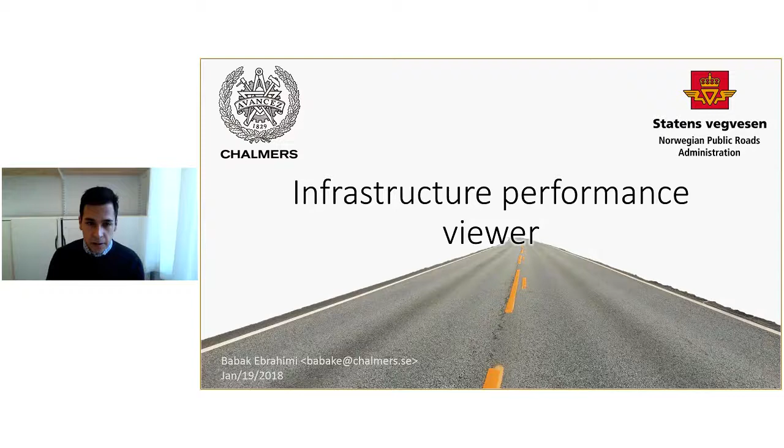The work of our research is related to sustainability of road infrastructure in Norway, and we quantify performance of material, product, services, systems, and this is done due to the fact that there is a strong causality between sustainability and performance of materials. But later on, quite very soon, I will get to the point of what I mean by sustainability and performance of materials.

For today's presentation, we're going to have a straightforward and minimalistic agenda, which means that I will go through the background of the research, talking about some of the research topics that we have done and the summary of the results, and at some point in between these slides I will talk about the outlook and the future of the research that we have, and a brief explanation about this research that we have been doing.

Our research is dedicated to Norway because the Norwegian Public Road Administration is our funder, and this is the nation that we've been dealing with. It's a country with a population of 5.2 million people, which, if we put it into perspective, has the lowest population density in Europe after Iceland. And as you can see, the majority of the population is located around the coastal area in Norway.

And this is a nation where road transport plays a fundamental role in people's life. Around 88% of all motorized travel undertaken in Norway is by road, and about 50% of all goods are transported on roads. And based on the plan that has been explained by the Ministry of Transport and Communication, the idea is to invest more in the Norwegian transport system to increase connectivity and help the nation to get closer together.

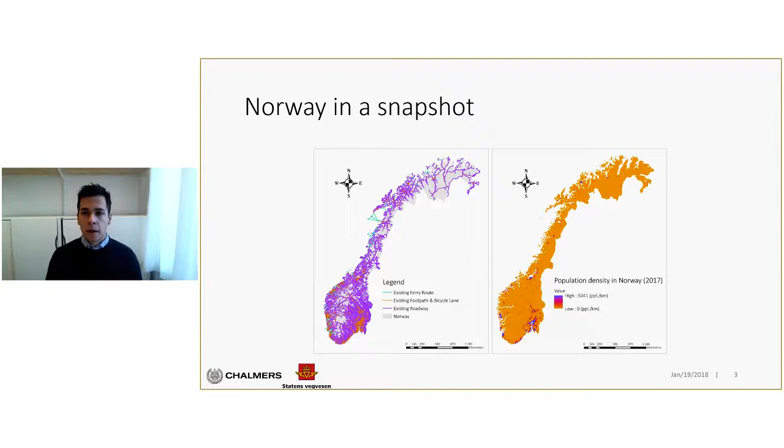And having this trajectory, the idea is to spend more than 1,000 billion Norwegian kroner over the course of 12 years to modernize infrastructure while developing the transport by providing more effective, more efficient, and greener solutions at the end of this time plan.

And to be a bit more specific, based on the mandate that the Norwegian Public Road Administration has received from the government, the NPRA has an idea to enforce various climate mitigation measures. The idea is to decouple negative environmental impacts and resource use from economic prosperity and social welfare of the nation. And in doing so, the NPRA is tackling various aspects of road infrastructure.

Some of these mitigation measures are happening in the in-use phase of road infrastructure, by vehicles. In achieving the goal, the NPRA plans, in a series of time frames, to increase the share of biofuels and reduce the non-renewable or conventional fuel sources, and at the same time change the powertrains of vehicles by using more hybrid or electrification of vehicles.

And at the same time, they have a broader perspective, meaning that they are focusing on the entire life cycle of road infrastructure, aiming to reduce greenhouse gas emissions by 40% from the construction of road infrastructure and by 50% from the maintenance and operation of road infrastructure.

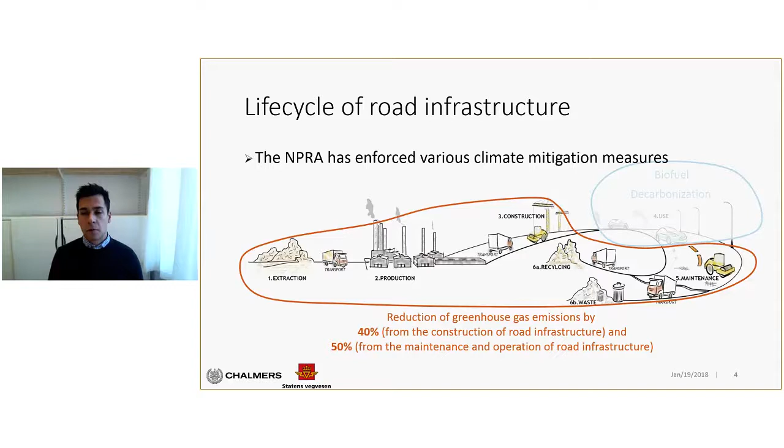However, in this research we only focus on the solid road infrastructure, and we exclude the use phase, the vehicle aspect, from our research topic. To be more specific, the goal of our research is to support the Norwegian Public Road Administration to economically and environmentally plan and maintain their open road network.

And the scope of our research is to use two well-established and widely used methodologies that are known as life cycle assessment, LCA, and life cycle cost analysis, LCCA. And using these two methodologies, we are planning to compile and assess various data and visualize our assessments.

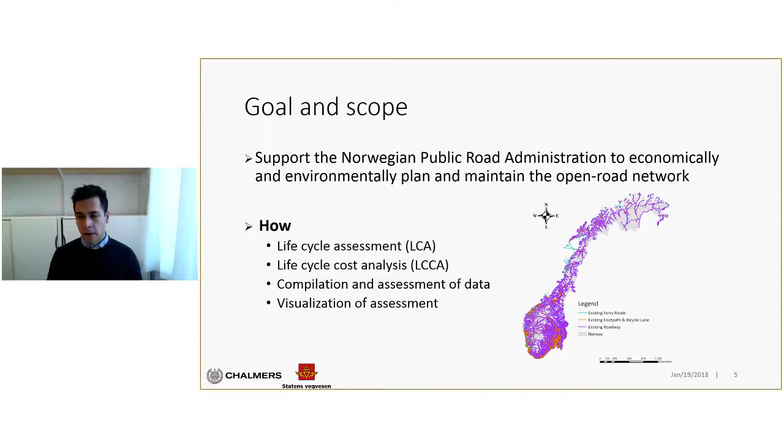And in this journey, I'm not alone. I am working in a team of 6. I get supervision from my supervisors, Holger Wallbaum and Rolf André Bohne, from here at Chalmers and NTNU. And along this journey, I have 3 companions. They are all PhD students, 2 in NTNU and 1 in Agder, and we are all financed by the Norwegian Public Road Administration.

And the idea is to support each other and try not to step on each other's toes, but try to move and help each other out and try to find a solution from different angles and perspectives. And this collaboration wasn't only in words, it was also on papers.

So this resulted in various publications and co-publications. In this presentation, I'm going through 3 of these publications, and if you want, you can also have access to them whenever you would like. So now I'll go through one of these papers, which we carried out at the beginning of

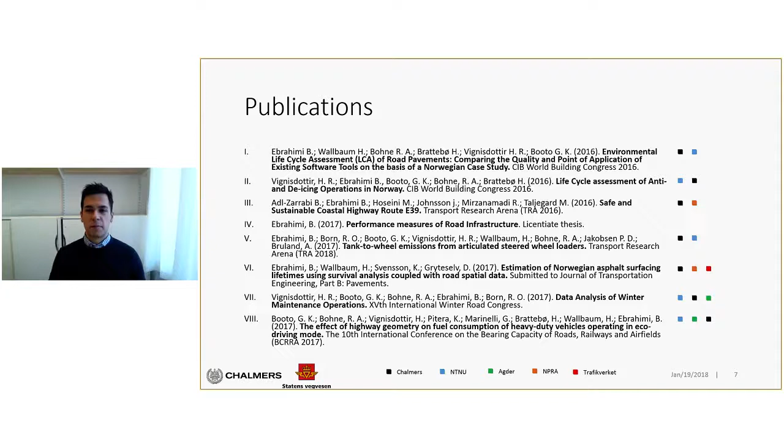my PhD life. At the beginning, we wanted to know what life cycle assessment is from the Norwegian Public Road Administration, and what their perspective is about LCA per se. We also wanted to know what software tools exist, how and to what extent they've been used, what the gaps are, and how we can improve these gaps in the software.

2 of them were more in the early planning phase, and one was more towards the maintenance aspect of road infrastructure. Some were pure LCA-based software, and one, EFFEKT, was more of an economic, social or cost benefit analysis software that eventually got an update to also do life cycle assessment. Instead of only a qualitative assessment, we also wanted to do a quantitative evaluation of the softwares.

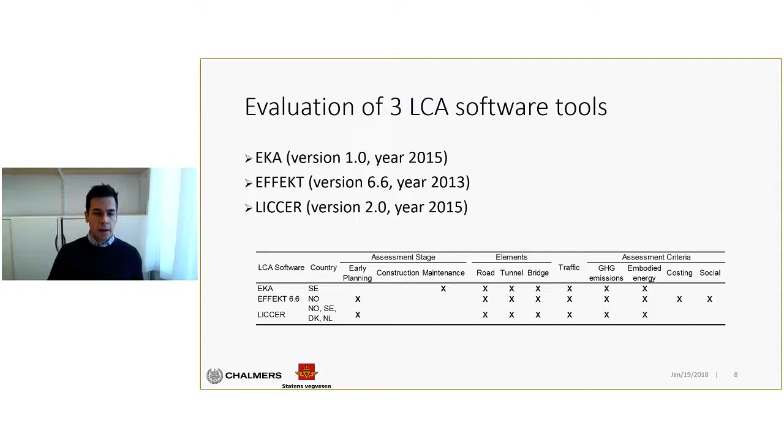So we designed a hypothetical case. We used one of the geometric road designs in a manual in Norway, road class H9, which is a 4-lane road, 2 in each direction, with a travel width of 3.5 meters and a hard shoulder of 3 meters, and in total the road width is about 23 meters.

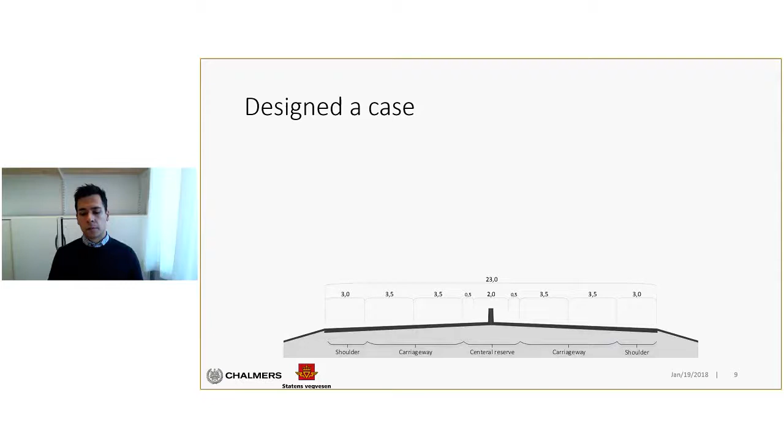We used manual N200 to design a pavement. With the assumptions we made, a certain ADT class with a certain traffic growth and so forth, we designed a particular pavement based on the manual. However, the software tools were not the same, so to do the assessment properly we needed a really clear system boundary.

So we used the European standard 15978, about sustainability of construction works, to define what stages we need to cover. Comparing the software, we found that only the maintenance aspect of road infrastructure can be compared. This resulted in excluding the construction phase, and instead we compared the maintenance activities that happen after constructing a road over the course of 20 years.

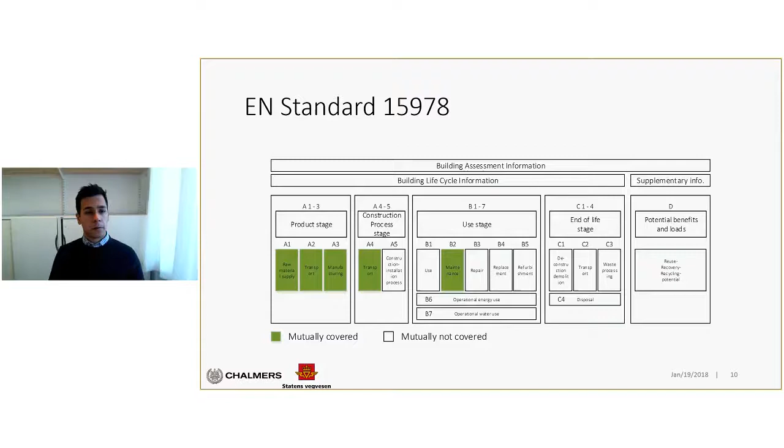We also considered the embodied energy and greenhouse gas emissions from the use of hot mix asphalt. No surprise, we got different results. We found that asphalt density and the asphalt mixing plant played quite a fundamental role. If you think about it, there were only 3 main components in this assessment.

There were aggregates, from production and use, and if they have moisture, how much added energy we needed to take this humidity from the aggregates. We had the bituminous binder, and we had transportation and energy used in the asphalt mixing plant. Asphalt density and the mixing plant were dominant in 2 of these softwares, which showed quite different results when we compared the assessment.

More than that, we found that 2 of these softwares were using different embodied energy for bituminous binder. They were treating bituminous binder as feedstock energy, and there's some discussion among researchers that we should not consider bituminous binder as feedstock and should take it out, because in the end we cannot burn bituminous binder. That's usually the argument between different papers.

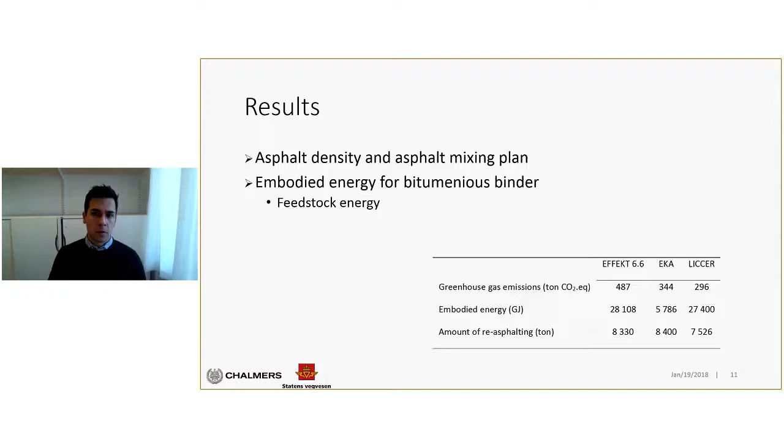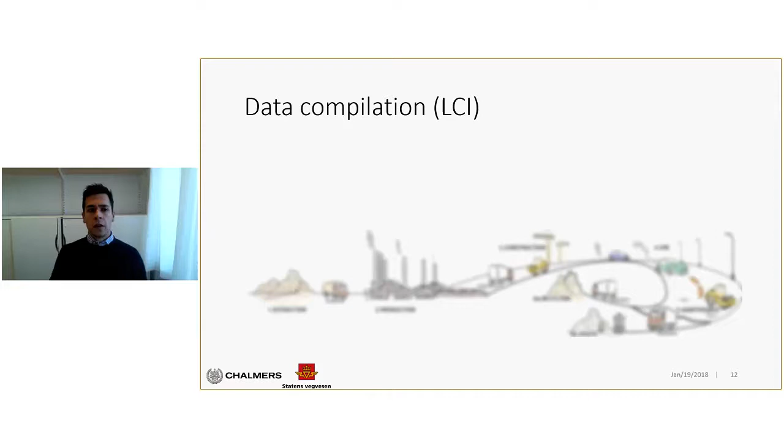After we finally got the results, we had a good idea of what we should do. So we started to compile different LCA data for the inventory of our life cycle assessment. Based on existing data from NCC in Sweden and discussions with IVL, we got some information on aggregate production based on different sieve sizes.

And also we were able to create different processes related to bituminous binders. By bituminous binder I mean that we have paving grade binder, polymer modified binder, and bitumen emulsions. So we were able to produce asphalt, and we also created some processes related to the asphalt mixing plant.

By having all these ingredients for producing road materials, we also created processes related to construction machinery. Meaning that we created inventory related to different non-road mobile machinery like articulated wheel loaders, articulated trucks, soil compactors, pavers, graders, and so on, so that we could get closer to building the hypothetical or existing road infrastructure.

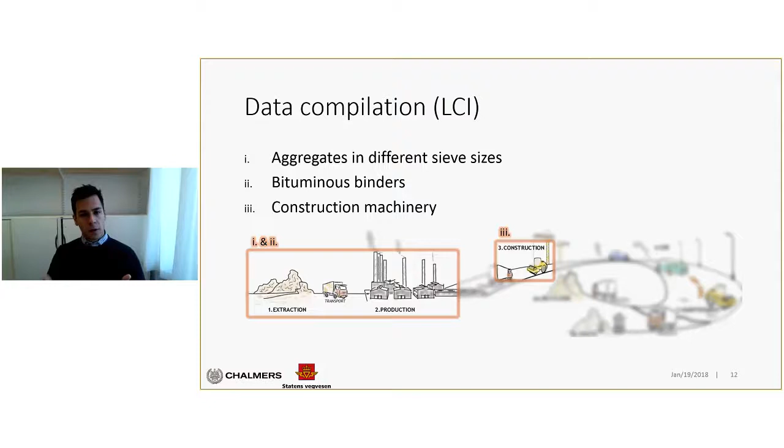However, when we got to the point that we could design a pavement or make all the earthworks assumptions that we need to, we came to the point that we had a very vague understanding about the maintenance or lifetime of road infrastructure. We know that once road infrastructure is built, it goes through an almost never-ending spiral cycle of maintenance activities. We were really curious to know how we should handle it, because from a scientific point of view, we needed to have a quite reasonable idea about these maintenance activities along the road.

And based on the research that we carried out, we found that maintenance activities or asphalt work correspond to 25% of total maintenance costs in Norway, which plays a fundamental role if you think about road infrastructure as having a long-lasting service life. So there are never-ending maintenance activities along their service lives.

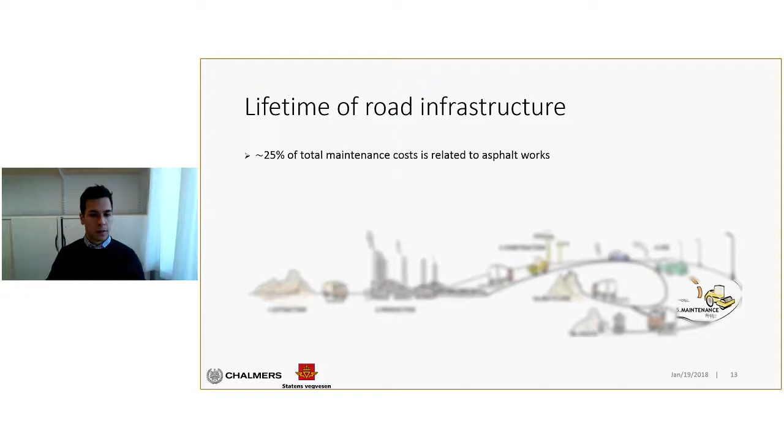And more than that, the traffic volume has been constantly growing. We only had access to a certain year period, but the traffic volume has been constantly growing in Norway. And interestingly, in the central, western, and southern regions in Norway, the growth of traffic volume was even higher than the national level. And if we think of this, we need to know how fast or slow certain roads or sections in certain regions or districts are going to be maintained, and what is the intervention level that we need to take.

And going back to the same graph, if you look at this national level growth and divide it based on the weight of vehicles, you can see that the growth of the share of heavyweight vehicles is twice that of lightweight vehicles.

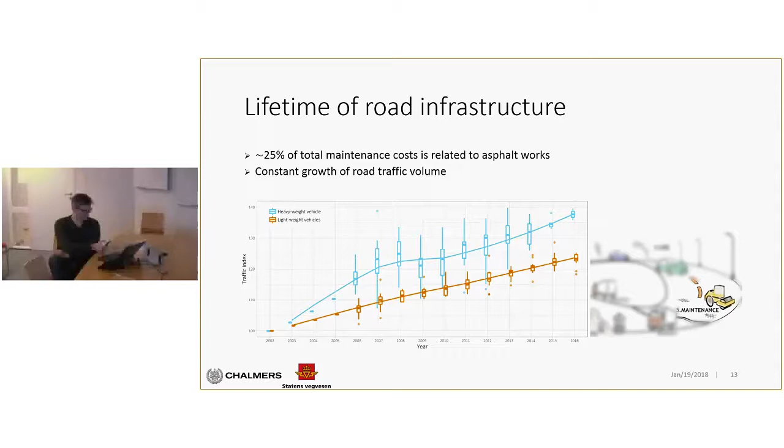And more than that, there is a certain increase in service level requirements from road infrastructure. Some roads need to be improved due to the increase in traffic volume, and we need to increase the bearing capacity of a road, or widen the road, and different changes happening inside the road network subsequently have a knock-on effect on the neighboring networks.

And more than that, the effect of maintenance activities on road users. Whenever we close the road, this has an impact on the users, so they need to take a detour, or the travel time increases, the wear and tear of vehicles increases, and at the same time it results in an increase in emissions and fuel consumption of the vehicles.

And also, when we got even deeper into the research, we found that there are some ideas about the nominal lifetime of materials, specifically the nominal lifetime of asphalt surfacing, but we did not know what the technical lifetime of asphalt surfacing types would be. This resulted in a series of discussions with different people in NPRA, Vegdirektoratet, and some consultancies to see what can be done in order to find the best, feasible approach.

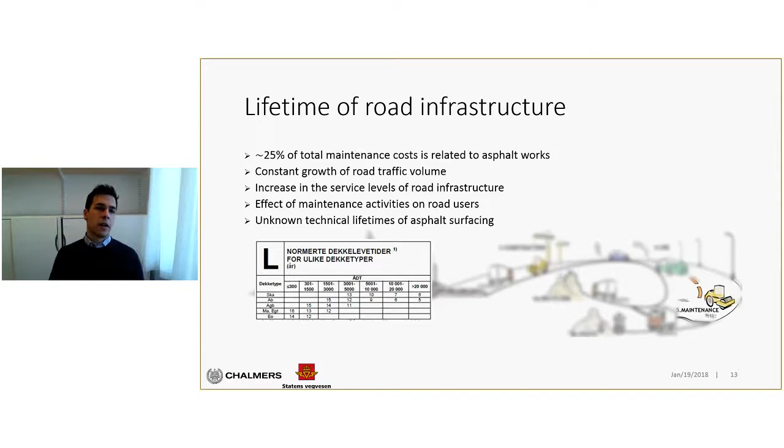So based on literature review and discussions with pavement management system people in NPRA, we found that we can technically estimate the technical lifetime of asphalt surfacing types in Norway. And in doing so, we needed climatic zones data, signed speed limits, asphalt surfacing type, annual average daily traffic, traveled way width, and road condition measures.

Some of these things already existed in the data catalog in the Norwegian Road Data Bank, but some of them did not. For instance, climatic zones didn't exist, so we needed to find another approach to solve the challenge. And more than that, road condition measures were quite controversial for our study, because we needed to see what the technical lifetime would be, in the sense of when pavement distress occurs.

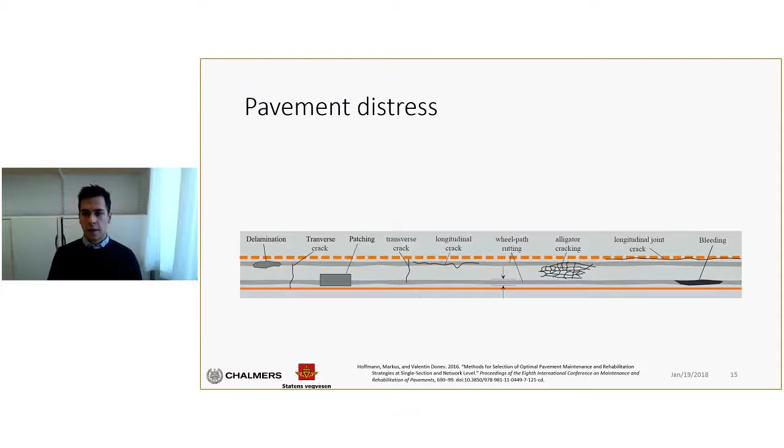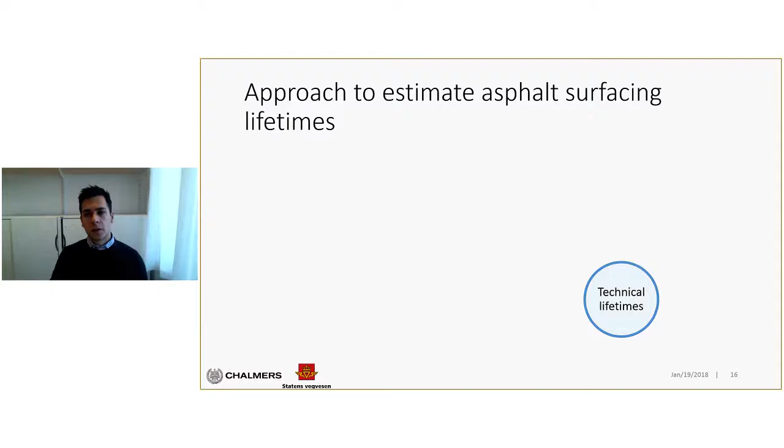So we started our journey. Our end goal was clear. We wanted to know what the technical lifetimes are. But to get to that point, we needed to start collecting the data. And in doing so, we used the Norwegian Road Database, also known as NVDB. However, the data that we collected did not communicate. They didn't at least have a foreign ID that could be used in software like SQL Server or other data transformation tools.

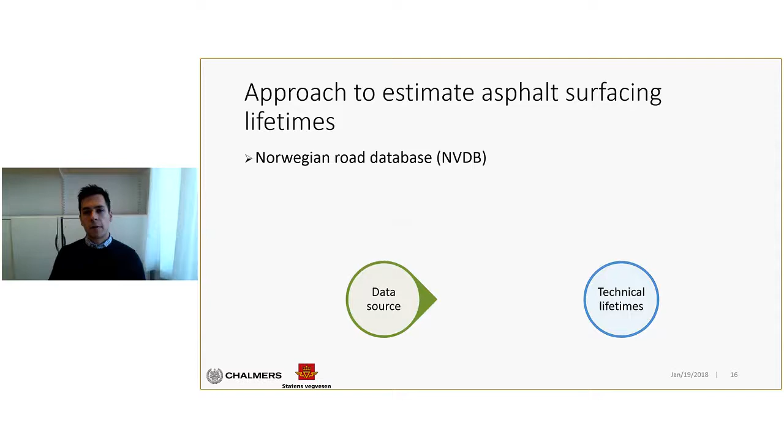So in order to transform the data to communicate with each other in a rational or logical way, we used geographical information systems, ArcGIS and FME, these two softwares. And at the end, after several sequential transformations, we were able to create an attribute table consisting of various indicators, like the pavement type, the maximum aggregate sieve size, the binder type, the speed limit, and so on and so forth. And then we had the attribute table that we were aiming for from the beginning.

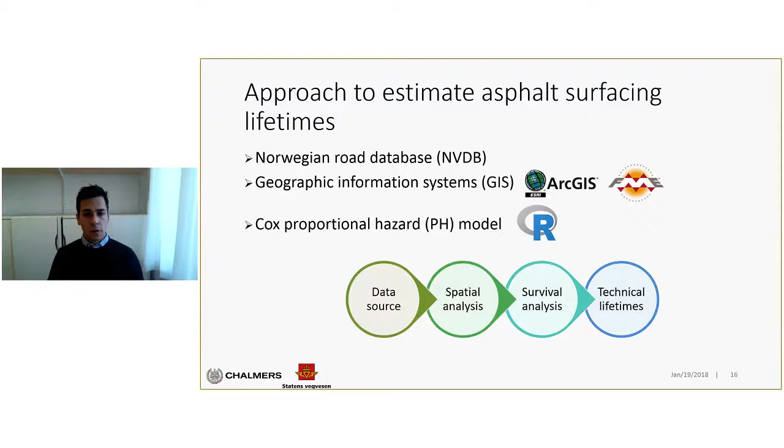And after having it, we performed a statistical method known as survival analysis. In that method, we used the Cox proportional hazard model and the R programming language to quantify these technical lifetimes. And we didn't aim big, so we decided to go for only 3 counties in Norway. And as we were using rutting as a response variable, we decided to consider asphalt surfacings used for AADT above 3,000 vehicles.

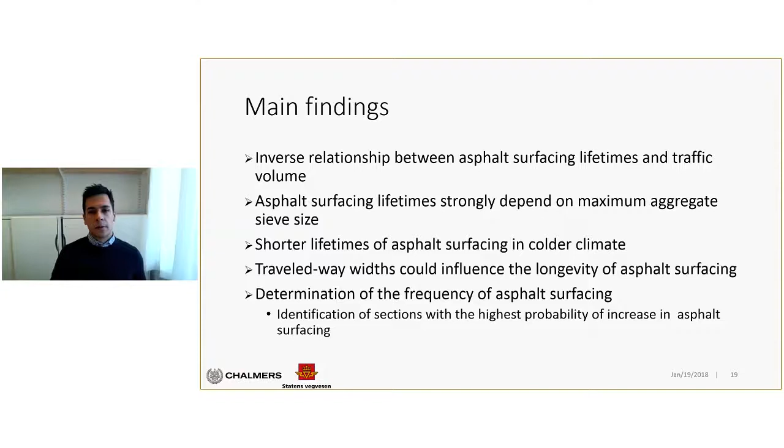Also, this summer we got really good access to certain data from NTNU, which we ended up using and sending to a conference, peer-reviewed, at TRA, the Transport Research Arena.

The idea we had for this data was to introduce a screening emission accounting of different construction machinery, using Norwegian construction machinery data. We wanted to have an alternative approach than prior studies, meaning we wanted a top-down approach instead of bottom-up, because most prior studies used a method called PEMS, portable emission measurement systems.

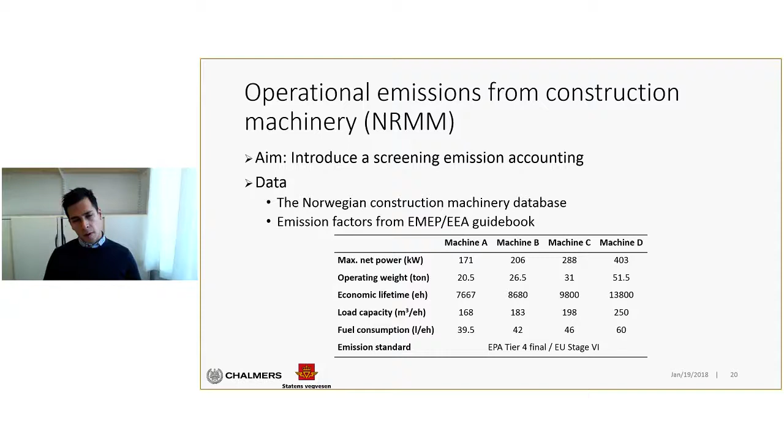And by fitting all this data to some certain simple equations, we created this to determine what will be the fuel-based emissions per economic lifetime of machineries.

And no surprise, when a machine consumes more fuel, it means that it emits more pollutant. No surprise for that one.

But this emission, the share of increase in amount of pollutant, was sometimes depending on the deterioration factor that the machine could go through. This means that for some certain pollutants, due to the deterioration of engines, more pollutant would result at the tailpipe of engines.

And more than that, we didn't stop there. We continued, and we also used the results to show the effect of load capacity on gas emissions, because in the previous part we showed emissions per effective hour. However, we decided to go further and determine the emission per moved volume or load capacity of different trucks and different wheel loaders.

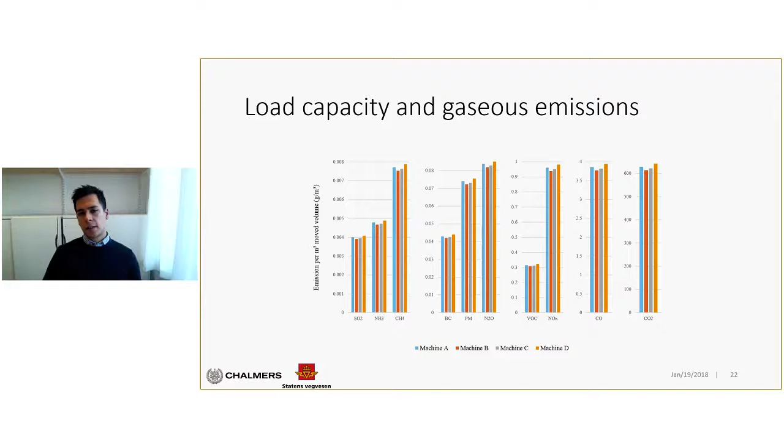Based on this method, we're going to continue, and now we're going to follow our dream and publish a paper soon, very soon, based on life cycle assessment of construction machinery. This means that instead of only dealing with this area, which was the main focus of our study, where we looked at the direct emission from the operation of machineries...

Now we are aiming to consider the whole life cycle of construction machinery, also known as non-road mobile machinery, to determine the emission in different life stages of machinery - what happens during the use phase, how often we need maintenance, repair, service changes, and what the effect of the use phase is compared to other life stages.

And by that, I think I can conclude here and say thank you. Now I'm open for all your questions, if you have any.

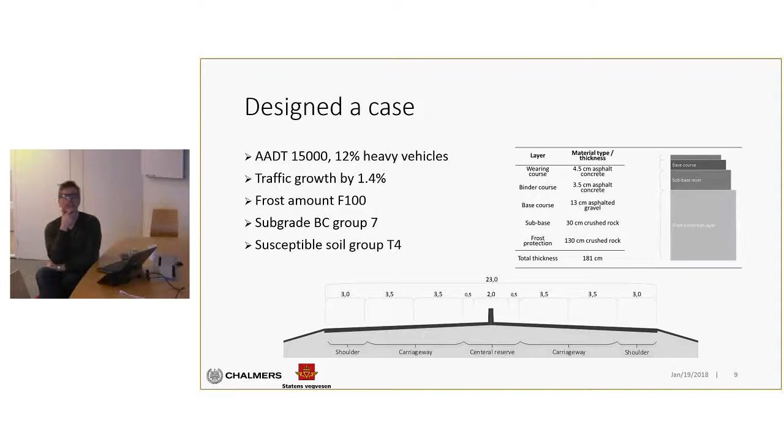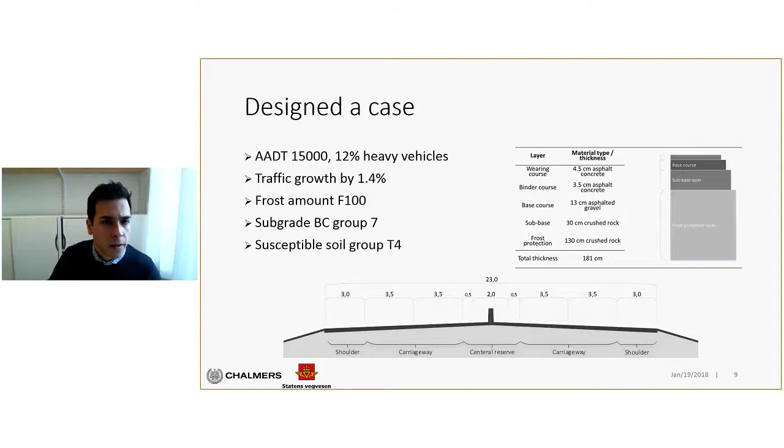I don't want to say for sure, but I don't think so, because heavy loading is the main reason for deterioration in asphalt surfacing, especially with the subsoil subgrade. In the study we carried out, the method we used was based on a stratification method, so we stratified the data based on traffic volume, or total annual average daily traffic. But as an explanatory variable, we considered the effect of heavy weighted vehicles.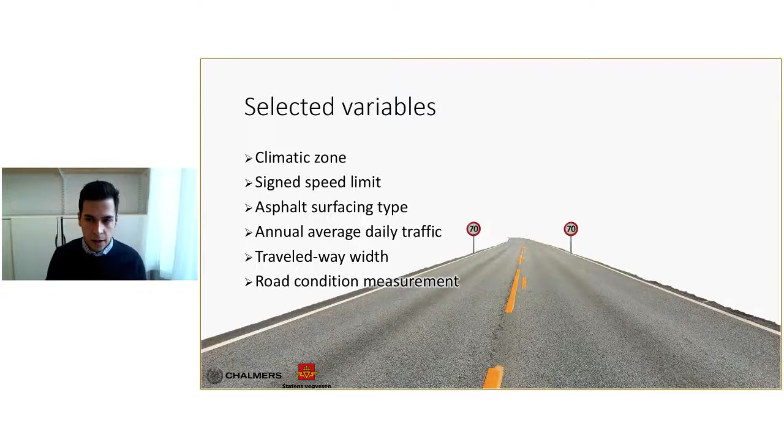But for sure, increasing heavy traffic volume, heavyweight vehicles, substantially affects this repetitive loading, in combination with different types of fatigue and so on, and maintenance backlogs. We might end up with a really poor surface, more frequent and shorter lifetime of materials.

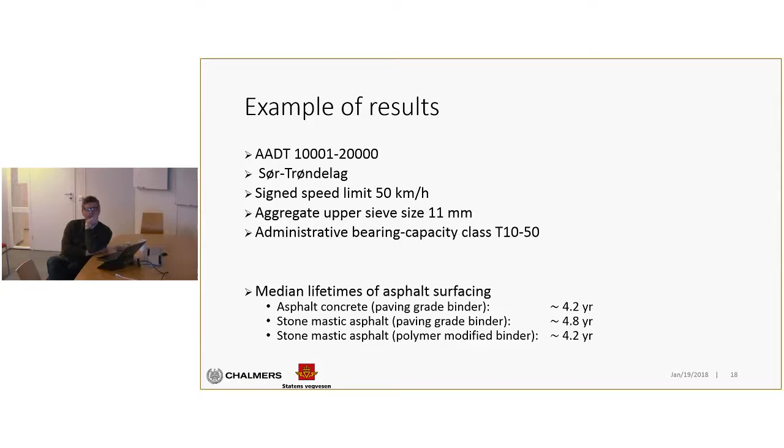Okay, thank you. And then I have one more question. If you could go to the life cycle analysis of the machinery, that slide. Is it this one or the next one? Next. Yeah, oh yeah, this one. Yeah, that one.

Exactly. I was talking to MF - what was it - MEF, I think it's called, the machine entrepreneur. Yeah, I think it's called the Norwegian Association of Heavy Equipment machinery, or something.

They had such an idea of using battery-based machinery, or some of them were thinking of using plugged-in, based on discussion I had with them. But they don't still exist. So in order to find this actual solution, this LCA we are doing aims to provide the baseline emission for Norway, because we are using Norwegian data for the operation phase of construction machinery. We can somehow say if you further consider electric powertrain equipment, how much gain you will end up with.

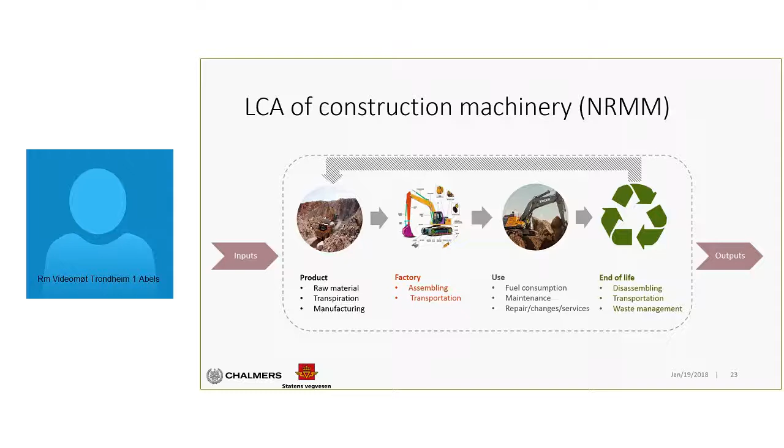Yes, I got it. Oh yeah, do you see my questions? Yes, there's a question asking about EFFECT being updated.

Do you have an input that I should make available for our colleagues? I don't know if it would be nice to get access to that, because there was one limitation with EFFECT that we had: it was really aggregated. It didn't provide the detail I wanted, like why we have a maintenance interval of 5 years, and why I can't play around with the data and say I'm using a certain type of mix and it's not going to be 5 years, it might be 6 years. But I can understand EFFECT.

The idea of using EFFECT was for early planning stages, and in early planning you should be very careful and try not to make a really wrong estimation. But it might be really beneficial to have EFFECT in other stages too, like maintenance activities or other phases, because it's still the same platform and many users know it, and it can help quite a lot. I think it's the same for machines.

Maybe I should read it. The machines that had the best results, do you have any suggestion on how we can take this description into our maintenance contracts?